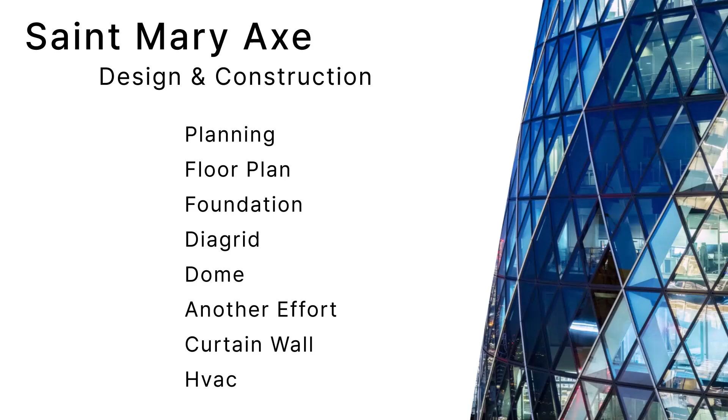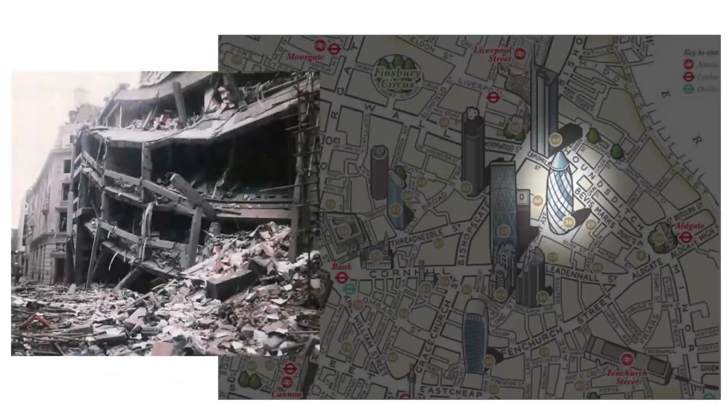Today we are going to start the final presentation about St. Mary Axe design and construction. The site of the St. Mary Axe building is where the Baltic Exchange was originally located. However, it was collapsed by terrorism in 1992, and a new landmark building was planned on the site to promote London's revival. The city wanted to build a building there with an innovative design that could represent London, which could

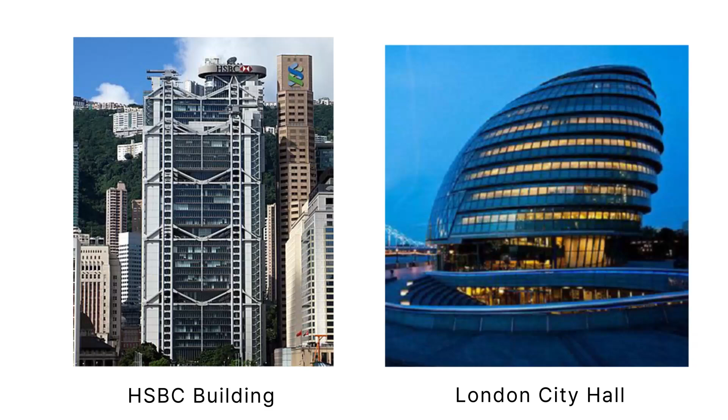be a new landmark. And Norman Foster, a master of high-tech architecture, was chosen as the architect to design the city's new landmark. So, what kind of architect is Norman Foster? Norman Foster is an architect who is interested in two things: high-tech architecture and eco-friendliness. HSBC Hong Kong's main building challenged high-tech architecture, and London City Hall was interested in eco-friendly issues and designed sustainably.

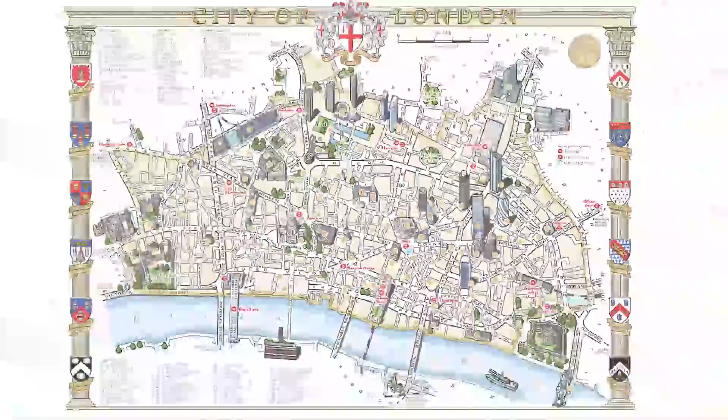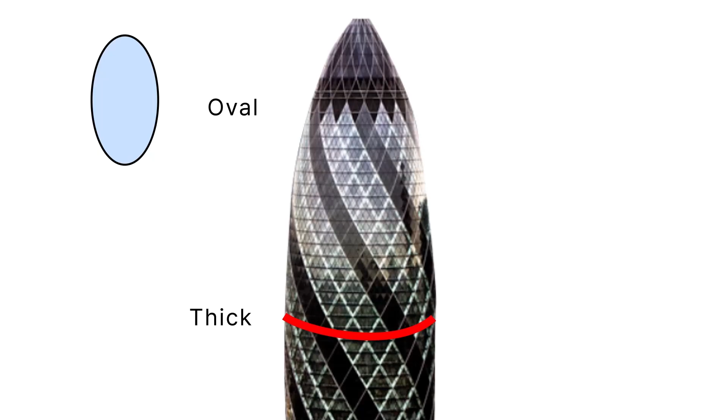Norman Foster, who built such buildings, also pursued this philosophy in St. Mary Axe. St. Mary Axe building used diagrids to implement innovative structural designs and was designed to reduce energy consumption considering sustainability. St. Mary Axe is located in the City of London in the United Kingdom. The building has a unique oval appearance by utilizing its diamond structure. The design is characterized by a thick center part and a thin bottom part. So the design was able to put as much public space as possible on the building's ground level.

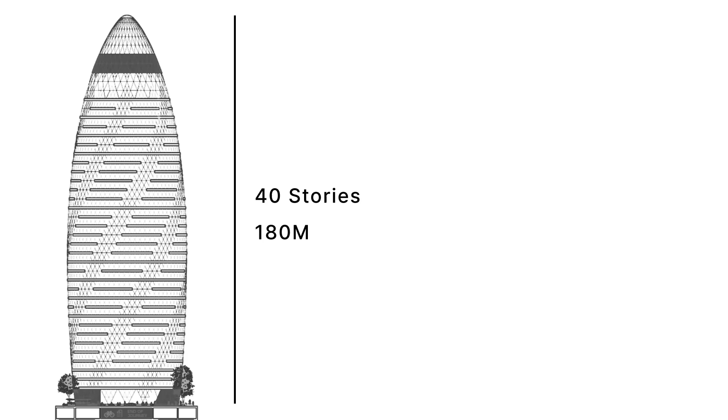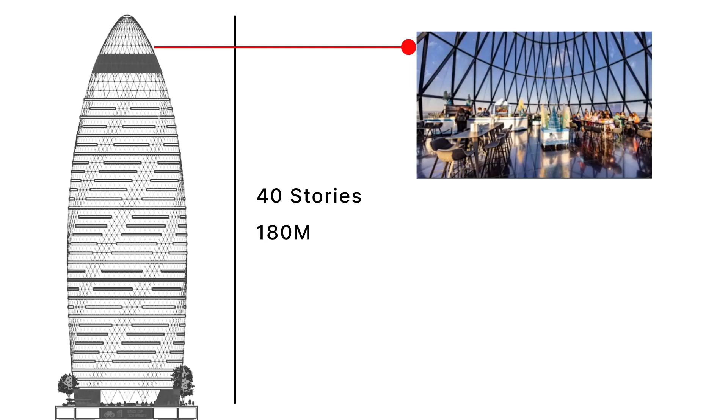In addition, the curved design is designed to minimize the impact of wind loads and to avoid turbulence in the city center. This allows the building to harmonize with the city environment while maintaining structural stability. These innovative designs have made the St. Mary Axe building an iconic landmark that defines London's skyline. St. Mary Axe is a high-rise building with 40 stories, 180 meters. The top three floors of St. Mary Axe are a restaurant and a bar with panoramic views of London, while the 3rd to 34th floors are planned as offices. St. Mary Axe has an open office space through a characteristic structure using a diagrid.

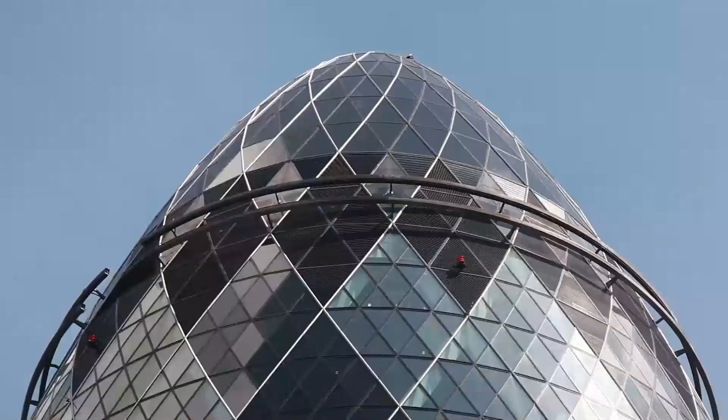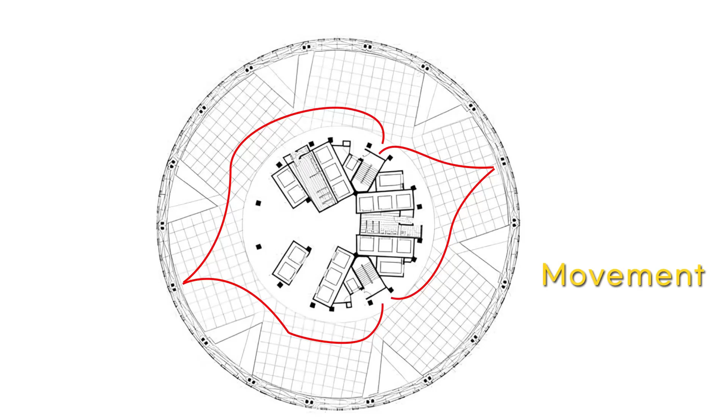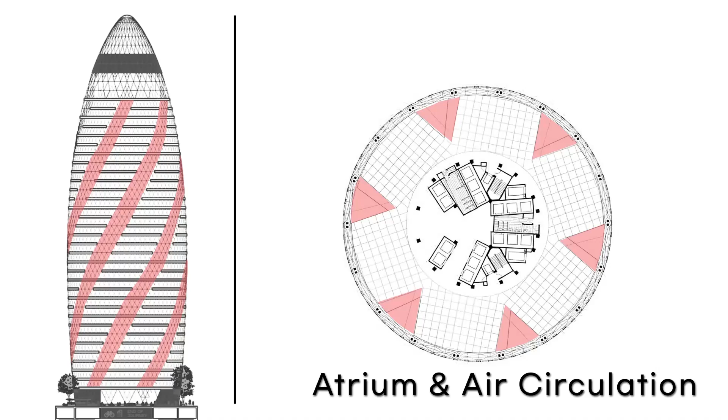Let's look at that through a plan view. St. Mary's has a circular cross-sectional design. Natural light enters in all directions, securing the right to view and increasing openness. It was able to simplify movement through the center core. Space utilization was increased through the efficient arrangement of facilities such as elevators and staircases. And 6 void spaces on each floor were used as atriums to promote openness and air circulation. As such, St. Mary's has created a pleasant and efficient office environment through innovative cross-sectional design and space utilization.

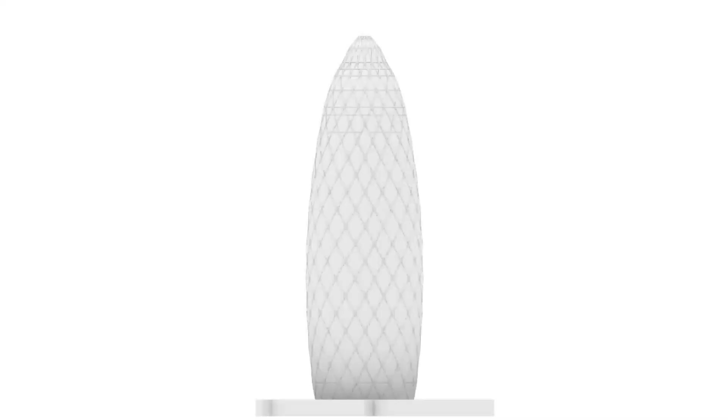Construction of a building begins with the foundation. What are some important considerations before constructing the foundation? Have you ever heard about the etymology of London? As an answer, there is a story that it was created by combining Lynn, which means next to a lake or stream, and Dun, which means city. There are many stories about London's etymology, but the common meaning is that it's an area with humid land. Back to the building. St. Mary's was built on soft ground made up of acidic soil and wet soil. Therefore, you have to pay attention to the differential settlement that can occur on soft ground.

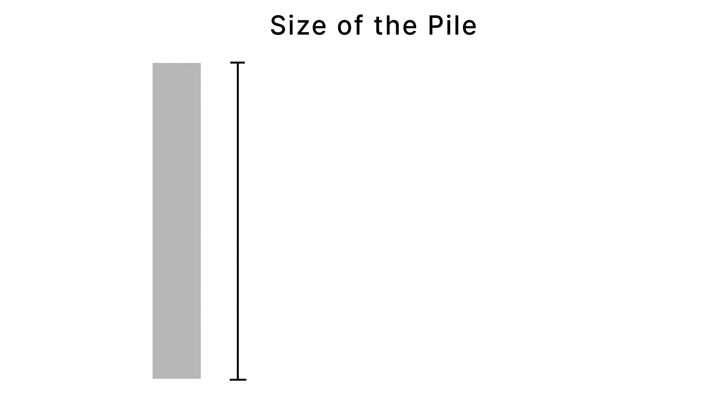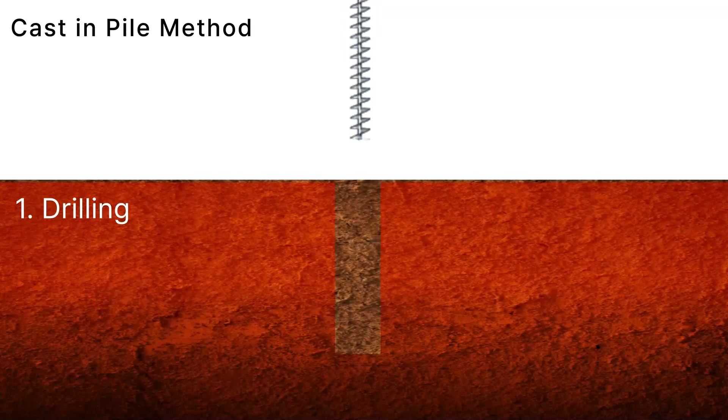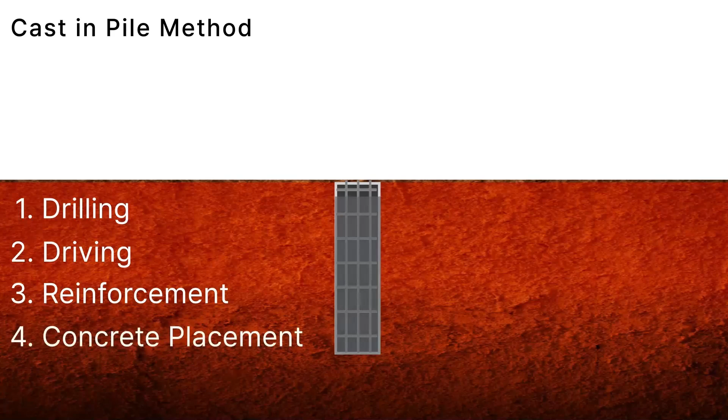Therefore, the St. Mary's building requires a lot of piles of a large size. The specification of the piles is 27 meters long and 750 millimeters in diameter. The total number of piles is 333. The piles used the cast-in-place pile method. Through the construction of the piles, constructors began laying the foundation for the St. Mary's building. The constructor installed the piles on the land. After that, the pile caps and piles were connected so that the load of the building could be effectively distributed.

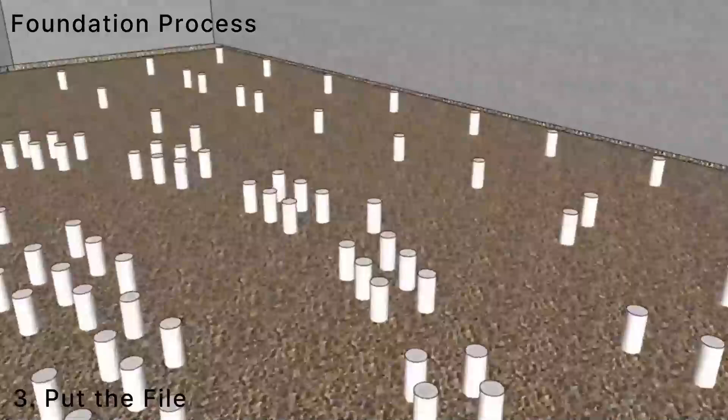First, dig out the soil of the site and support it with a mud barrier wall and braces to prevent it from collapsing due to earth pressure. Then put the piles around the edge and center. Rebar is placed on the embedded piles and concrete is placed on it in a short period of time. When the foundation is completed, the body of the St. Mary Axe building will be built.

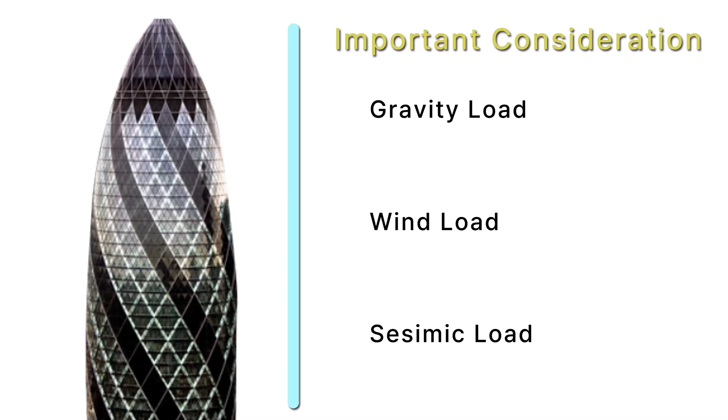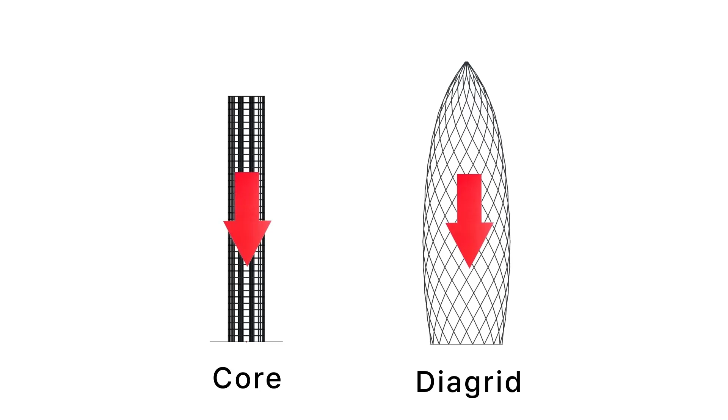Gravity load, wind load, and seismic load are important considerations for skyscrapers. The main structures of the St. Mary Axe building consist of a core and a diagrid, which has many advantages in load distribution, which is an important consideration. St. Mary Axe building is a skyscraper, which can be relatively less rigid as its height increases compared to lower-rise buildings. In order to increase the robustness of the core, it was designed by dividing it into an inner core

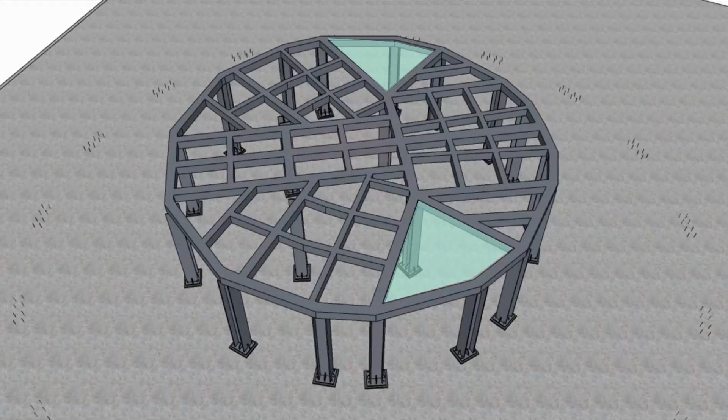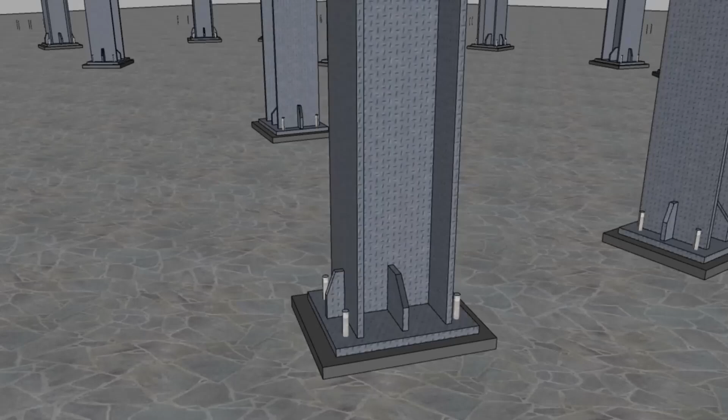and an outer core. In addition, the interior space was left empty to accommodate facilities such as stairs and elevators. The inner core is composed of H-shaped steel connected to the columnar part of the foundation and serves as a pillar. St. Mary Axe diagrid serves to effectively distribute its own weight, seismic load, and wind load.

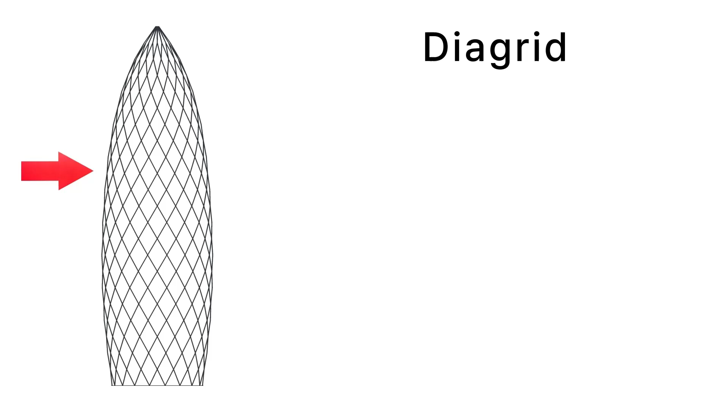This is one of the important parts from a structural point of view. This was directly connected to the main part of the building site, so that the load could be distributed to the ground. Diagrid construction is largely composed of nodes and diagonal members.

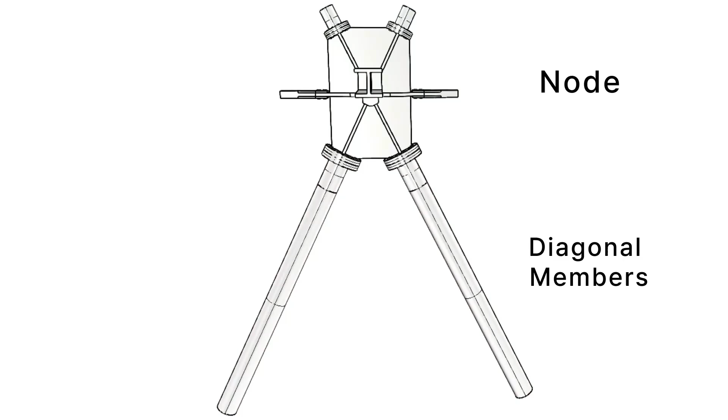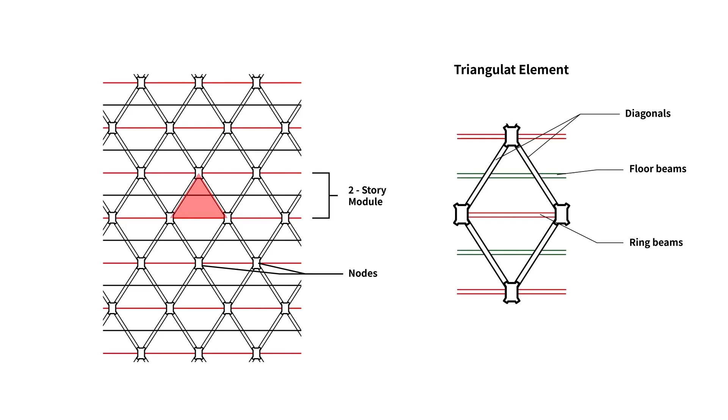The A-frame of one node and two diagonal members is one unit that constitutes a diagrid structure. In addition, the building's A-frame consists of a two-story triangular module. When a load is applied to the unit, the load can be effectively distributed from the node to the diagonal member.

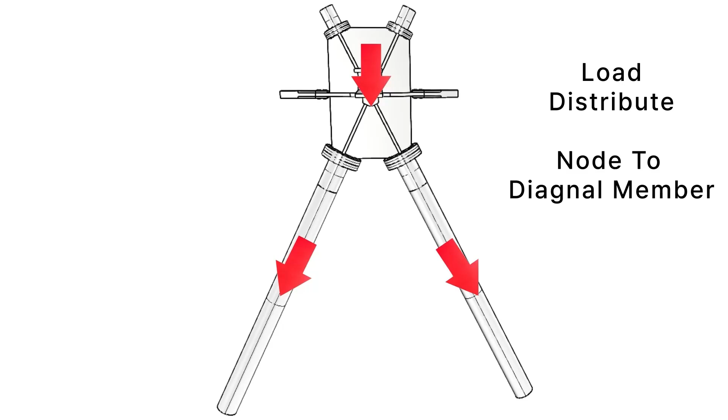Nodes are connected to other nodes through a ring beam and are connected to the core through a radial beam. Through this connection, the load can be effectively dispersed to the core by descending along the diagonal member of the diagrid. This A-frame could be stably constructed through connection with the core using a beam.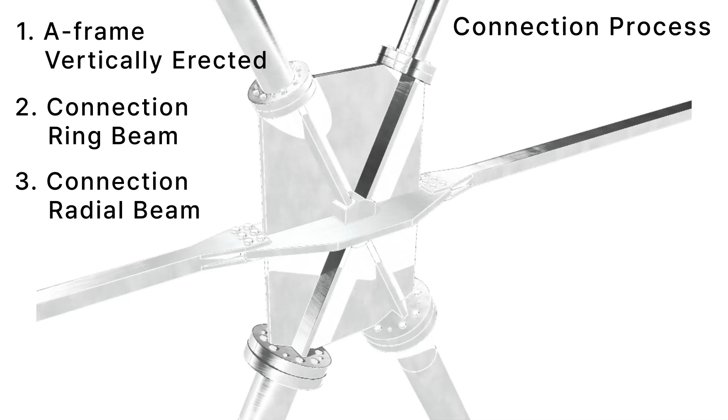The connection process has three main procedures. First, install the A-frame. Second, connect the core to the radial beam. Third, horizontal beam connection. First, frame A is vertically erected. Then it is connected to the core through a radial beam, and nodes are connected using a ring beam. Therefore, by repeating this process, frame A is continuously coupled to form a steel structure that moves intervally.

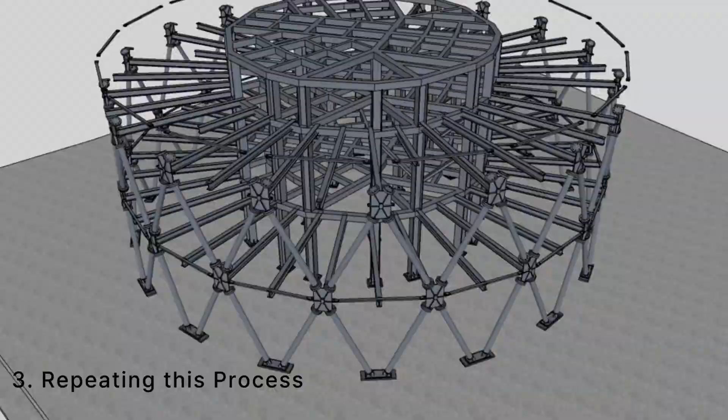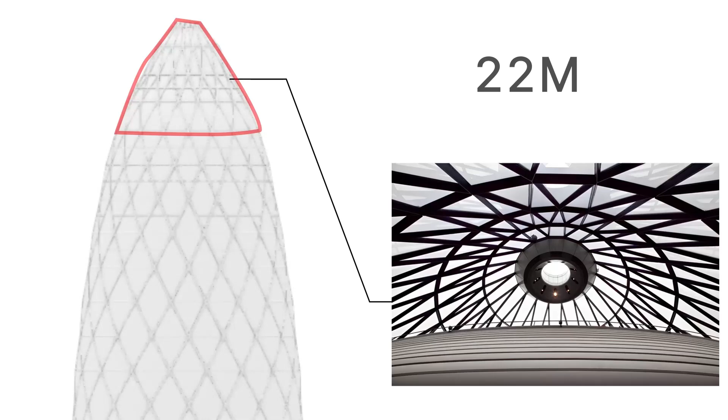When the construction is completed as the diagrid structure rises to the top of the building, the construction of the top dome begins. Unlike the main body of the building, the dome section, which is 22 meters high, is designed with a truss structure without nodes. The dome is mainly used as large, open space, such as restaurants and observation decks. The diagrid nodes have limited space utilization because they are connected to the core, but the use of the dome, which is a truss structure, will give enough space.

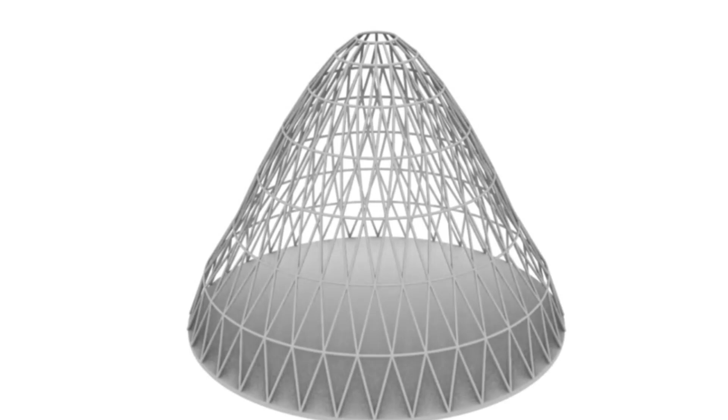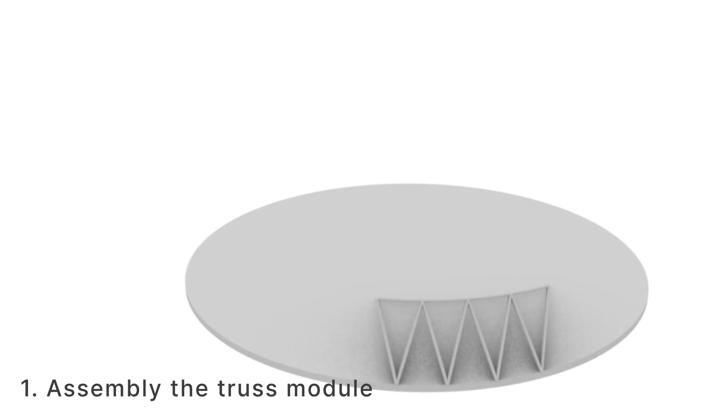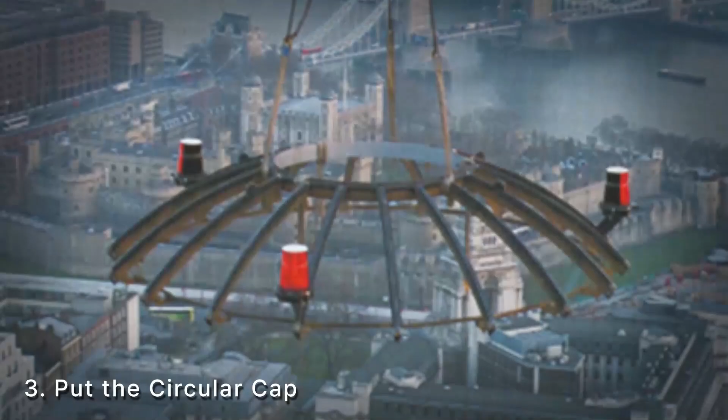The construction of the dome part is as follows. Assemble the truss module on the ground floor. It is then moved to the roof using a crane and connected to the diagrid. A total of 18 truss modules are joined together by welding. Finally, the construction of the steel structure is finished by putting only the circular cap to decorate the finish of St Mary Axe. How did the diagrid distribute loads efficiently?

The higher the building, the more affected by the wind load, so the area of the upper layer was gradually reduced to control the wind flow and maintain structural rigidity. For this reason, in order to achieve the optimal load distribution considering the area and height of each floor, a node angle of 60 degrees was adopted in some floors and 77 degrees in others.

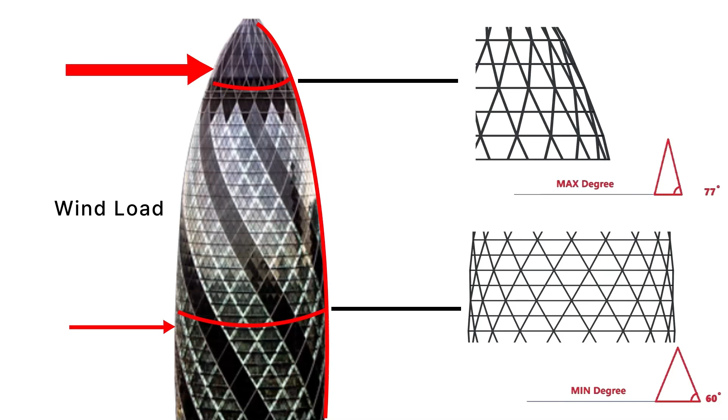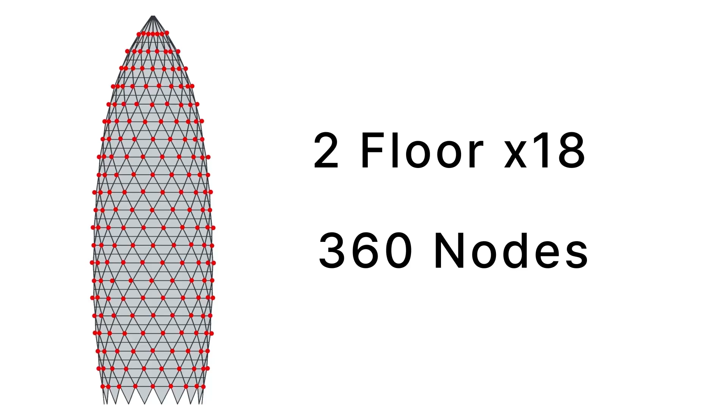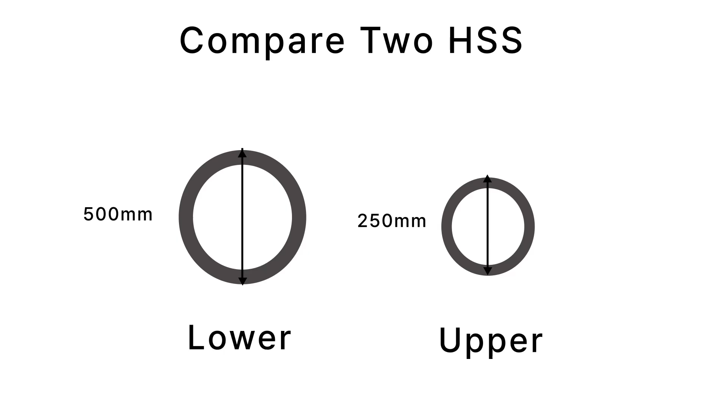These nodes were arranged in 18 units across each of the two floors, and a total of 360 nodes were used. In addition, the stability of the structure was increased by using the highly rigid HSS diagonal member, and the sizes of the upper and lower layers were set differently, enabling more efficient and accurate load distribution. What kind of efforts have been made to reduce construction errors?

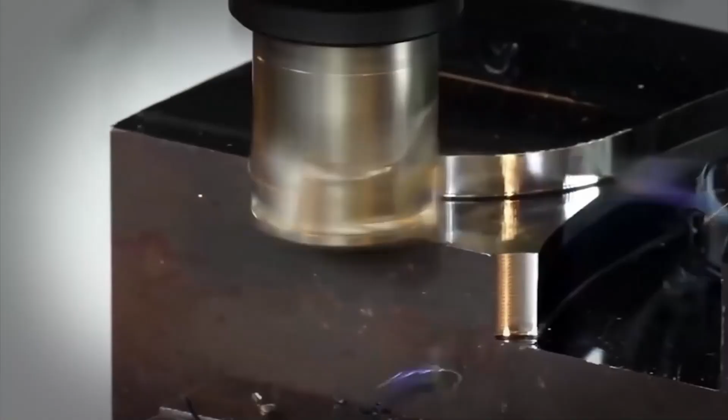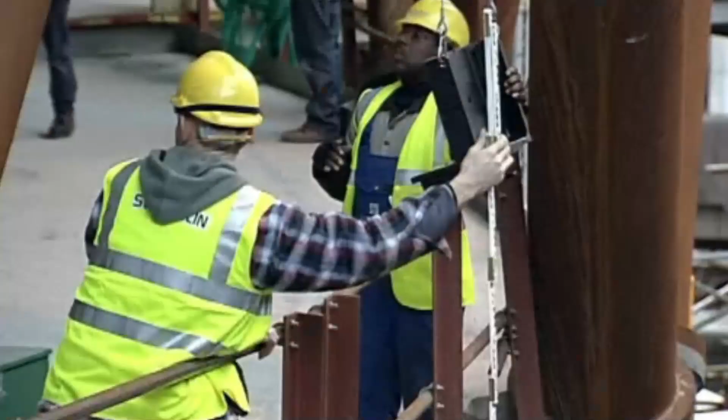First of all, in order to reduce the error in the fastening of the node and the diagonal member, the factory accurately processed the junction of the node and the diagonal member through the CNC milling method and the slot hole method. The factory-made diagrid is placed at the correct location of the members to maintain the adhesion and spacing of the node and the diagonal member at the site, and then constructed through temporary tightening.

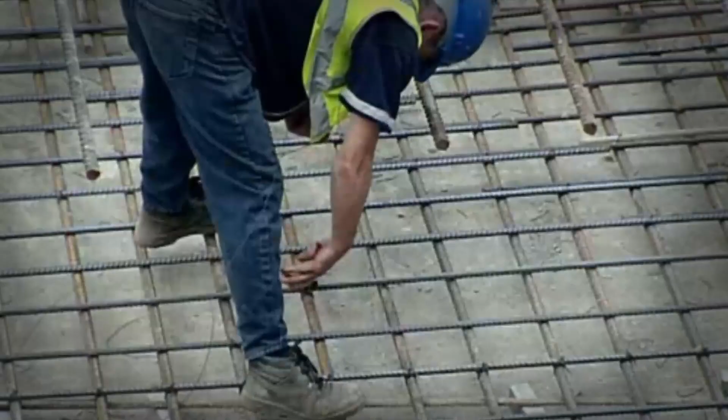After the overall connection between the diagrid and the core, the slab construction is carried out. This process is constructed using deck plates, stud bolts, wire mesh, and concrete. First, connect the deck plate to the radial A-shaped steel beam. Weld the stud bolts, lay the wire mesh, and finally pour the concrete. At this time, the stud bolt guarantees the integral behavior with the concrete.

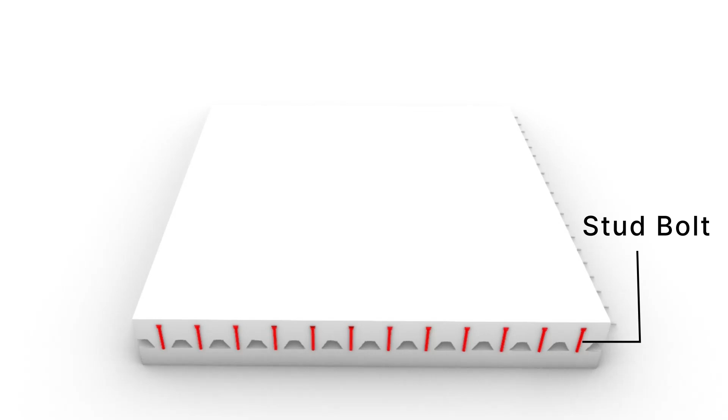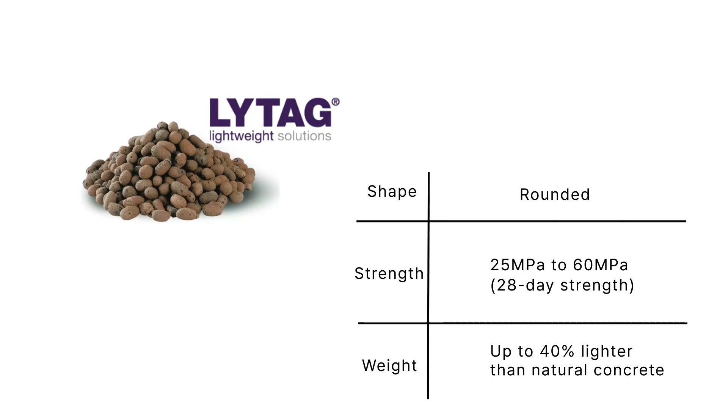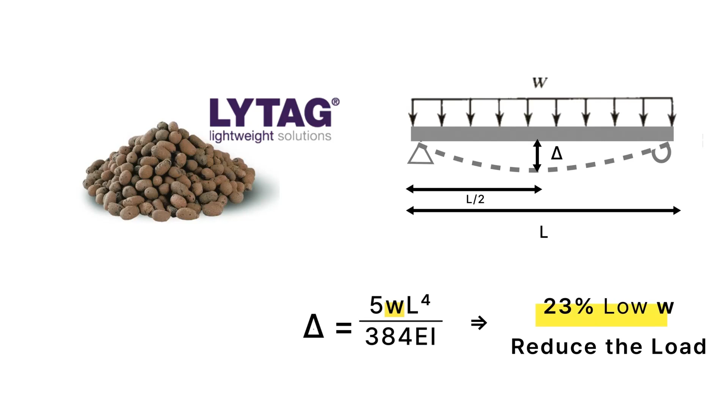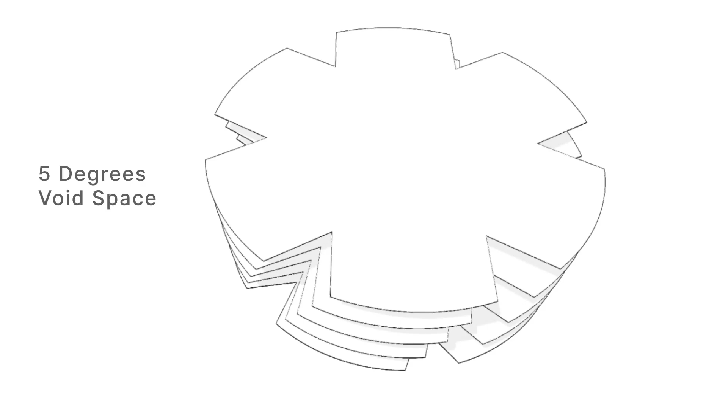Particular attention was paid to the usability of the steel structure in the case of the St Mary Axe building. To reduce the weight, Lytag lightweight concrete was used to reduce the weight of the structure by about 23%, which contributed to the result below the maximum sagging value calculated by the general sagging formula. In addition, for lighting efficiency and atrium space optimization, the floor plan was rotated by 5 degrees to create void spaces at intervals.

Next, let's look at how the curtain wall of the building was constructed. The exterior of the building, which has a round shape, is all designed with oblique steel beams and 5,500 double glasses in the form of diamonds. The spiral striped diamond pattern on the exterior further emphasized the building's natural lighting and ventilation functions.

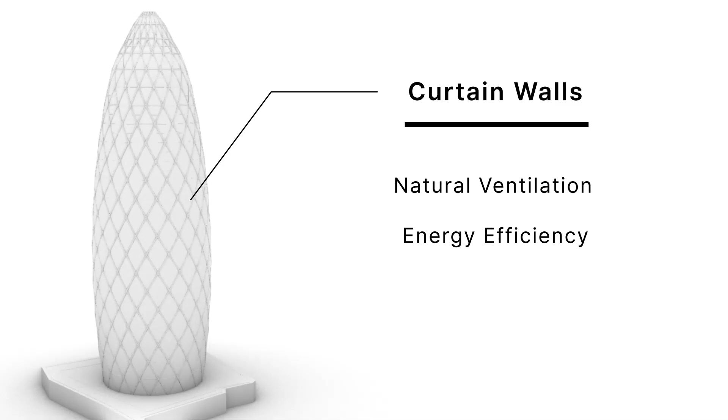In addition, the curtain walls of buildings maximize natural ventilation and energy efficiency. Due to the nature of London's weather, which has many cloudy and rainy days, the curtain walls of buildings had to take full advantage of the lighting effect.

Therefore, by controlling the indoor temperatures through solar management through the curtain walls, it resulted in energy savings of about 40%. The curtain wall of the building used the unit wall system. The exterior of the building is covered with a diamond-shaped facade. On the horizontal beams located in layers, brackets for substructure members of curtain wall finishes were planned.

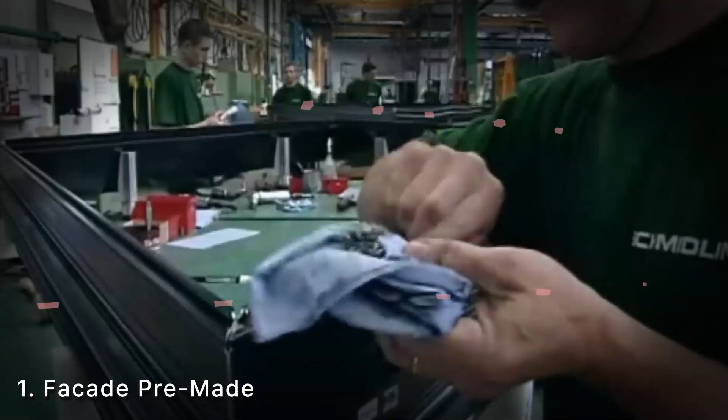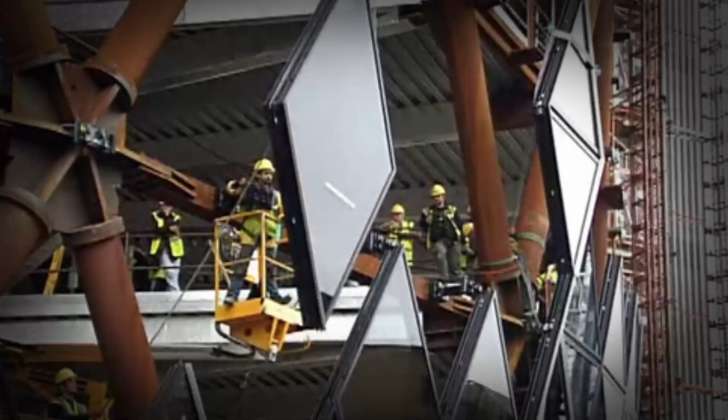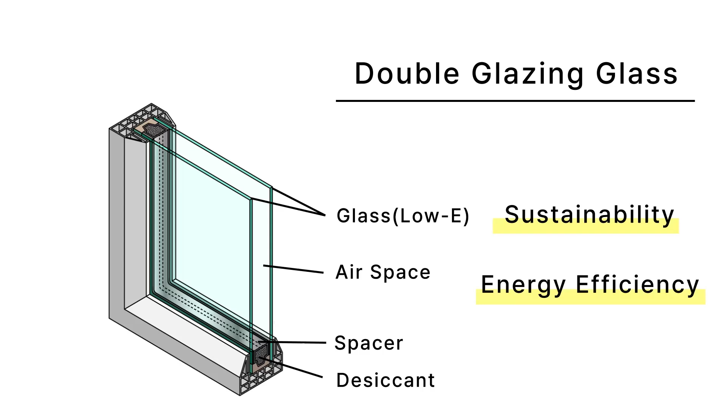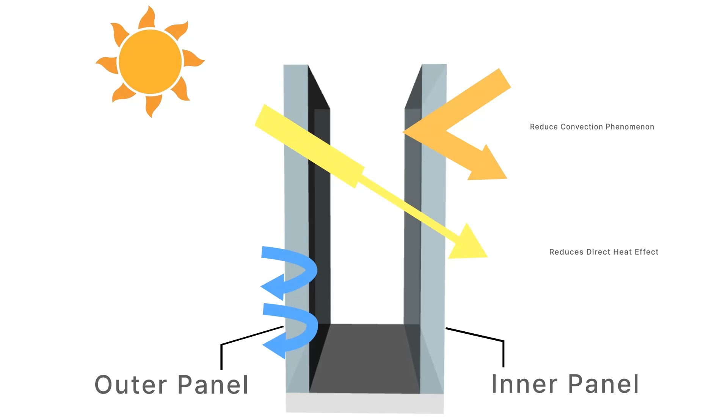Double glazing glass was used for the skin module of the curtain wall. Double glazing glass allowed us to increase the energy efficiency of St Mary Axe. It consists of inner panel and outer panel glass, which reduces the direct solar heat effect, and fills argon between the glass to significantly reduce the convection phenomenon of air, thereby reducing the heat exchange phenomenon inside and outside the window.

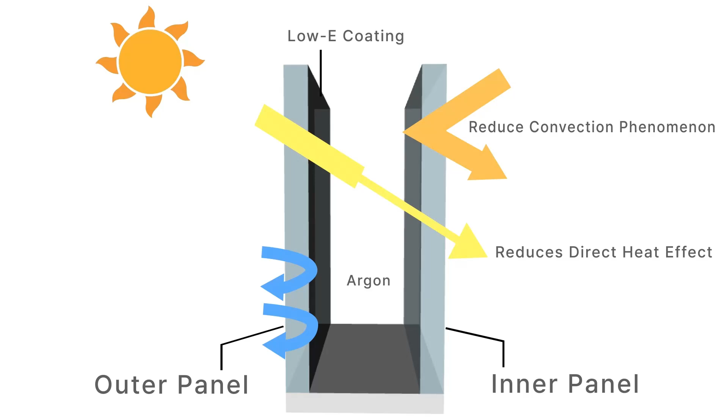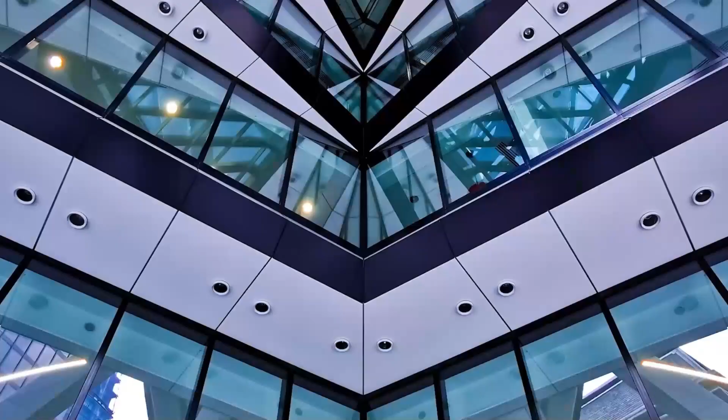In addition, the low E coating improves the ability to block heat entering the interior and condensation by 4 to 20 times lower than that of ordinary glass. The building induced sunlight to enter the entire building through transparent diamond-shaped panels. The sunlight coming through the curtain wall could be effectively spread by the inner light well.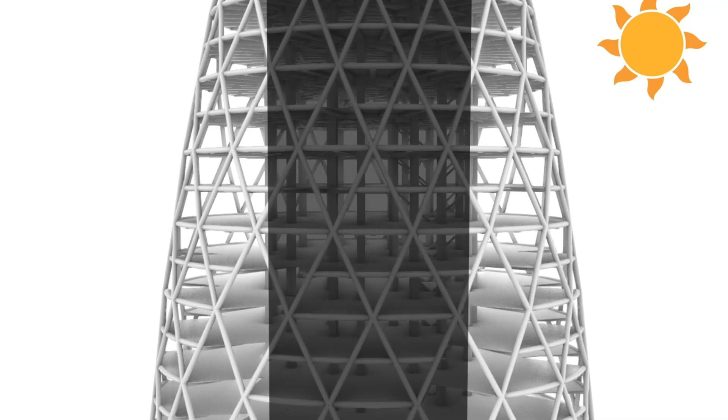The light well is not in the form of a general glass ceiling, but a void space is drilled into a slab on each floor so that the lower and upper floors could be connected. This allows natural light to permeate all spaces through the light well, depending on the planar configuration that rotates 5 degrees spirally. This had the effect of naturally improving the difference in illuminance between the center and outside of the building, allowing sunlight to enter the inner office.

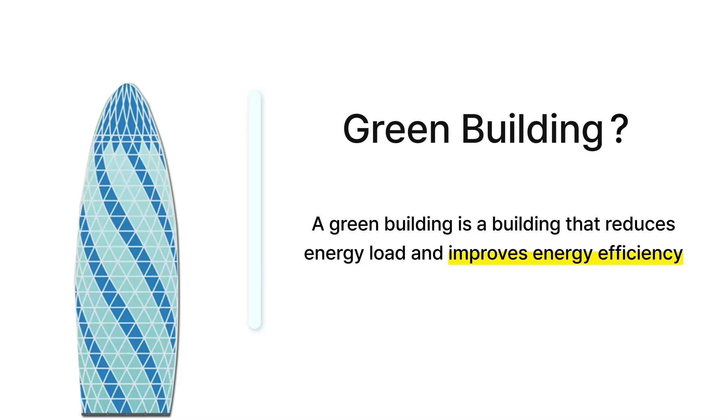After the complete construction of the building was completed, there was a question of how St. Mary's applied a different energy efficiency system than other buildings. Designed by Norman Foster, St. Mary's is a representative green building that introduces a number of innovative systems to increase energy efficiency. What is a green building? A green building is a building that reduces energy load and improves energy efficiency. So what approach did St. Mary's adopt to improve energy efficiency?

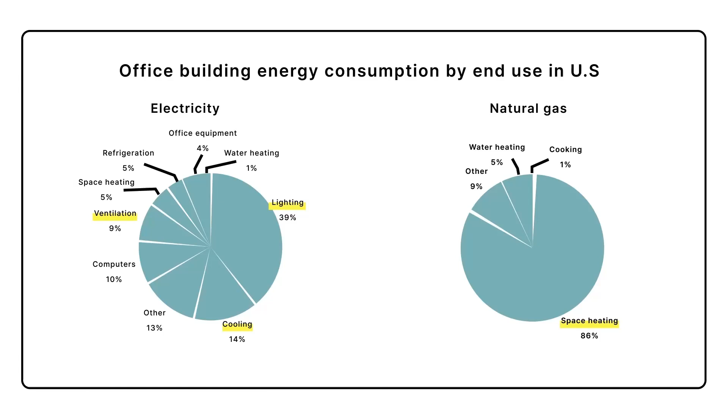As the table shows, lighting, cooling, and ventilation account for more than 60% of electricity used in most offices, and heating mainly uses natural gas. To reduce this energy consumption, Norman Foster designed to use natural ventilation to reduce the energy consumption used for heating and cooling in buildings. St. Mary's heating, ventilation, and air conditioning systems take full advantage of natural ventilation to reduce cooling and heating energy use.

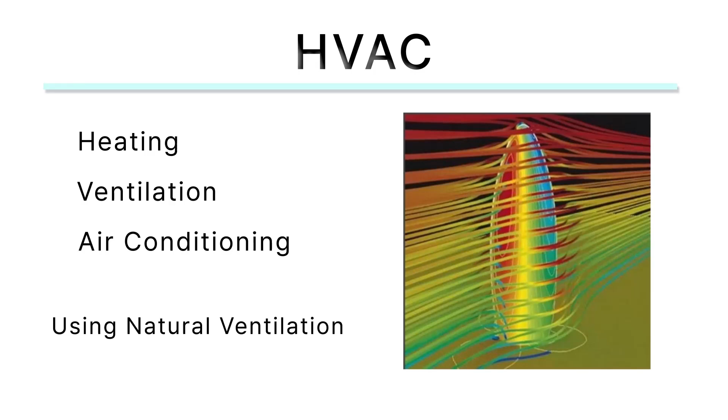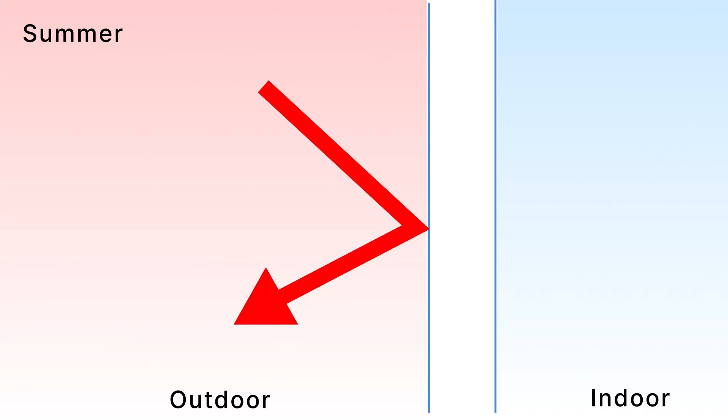Each floor of the building has a unique shape that turns 5 degrees, so it can accommodate more natural light. This reduces the amount of energy used for indoor lighting. And St. Mary's has a double skin. There is a space between the outer and inner curtain walls, so air circulates into this space. This prevents hot air from directly entering the building in summer and reduces the heating load by acting as an insulation layer in winter. And the automatic blinds are opened and closed according to the amount of insolation, adjusting the internal temperature.

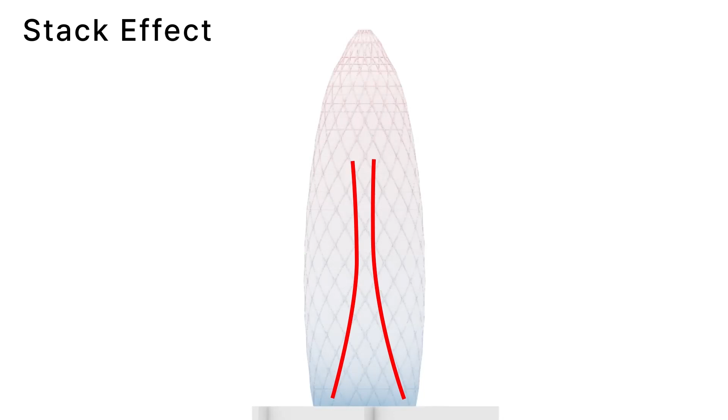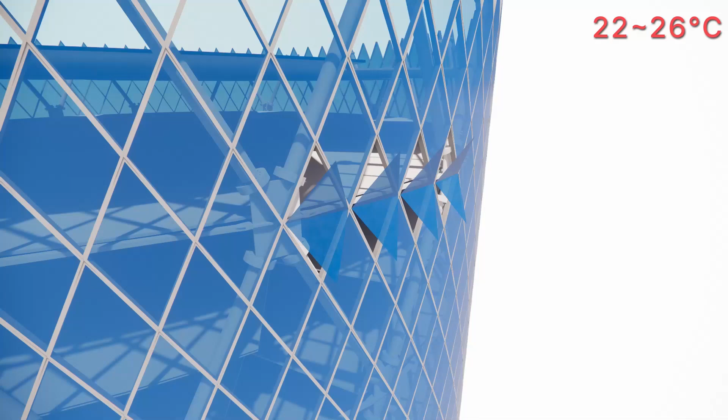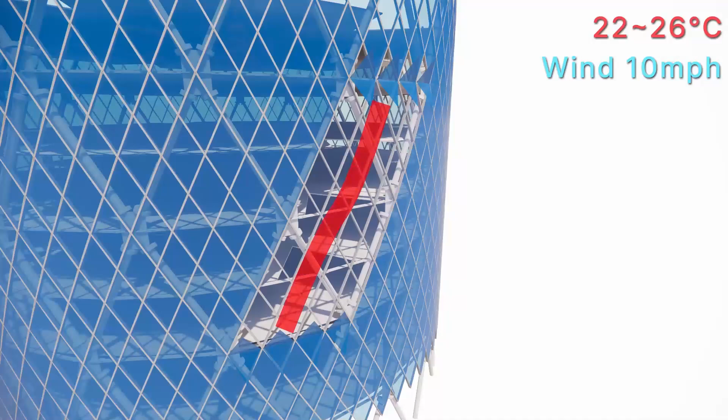How does air circulation work? The answer is the stack effect. The warm air inside the building has a tendency to rise, which is why it is used. The window automatically opens when the outside temperature is 22 to 26 degrees and the wind speed is less than 10 mph. Through this open window, the heated air inside the building rises and escapes. This creates negative pressure in the lower part, and fresh outside air flows into the open window in the lower part, resulting in circulation. In this way, St. Mary's, using natural ventilation, was able to keep the air inside fresh with less energy consumption.

These sustainable eco-friendly systems have enabled St. Mary's to halve the energy it uses compared to similar-sized buildings. Today, we looked at St. Mary's innovative architecture technology and eco-friendly design using diagrid. St. Mary's elegant curved design and unique shape have become a new landmark on the London skyline. Despite its enormous size of 40 stories, its flexible silhouette has become a signature of St. Mary's.

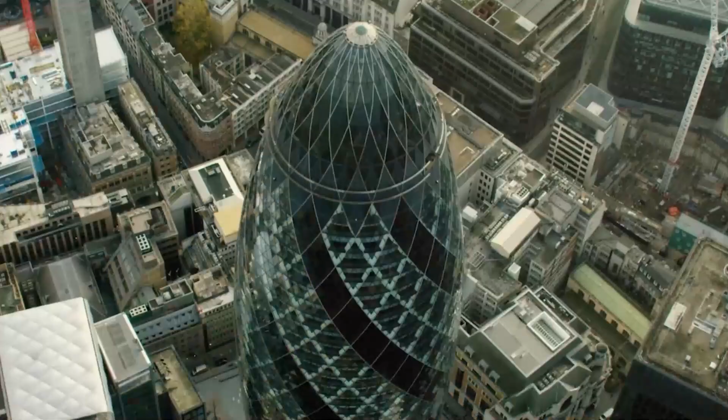After all these efforts, St. Mary's has now become a new landmark in London and an example of eco-friendly architecture. It is contributing to environmental protection by reducing carbon dioxide emissions by 25%. We think these pioneering structures will increase the sustainability of the city as a whole and point to the future of construction. Thank you for listening to the presentation.